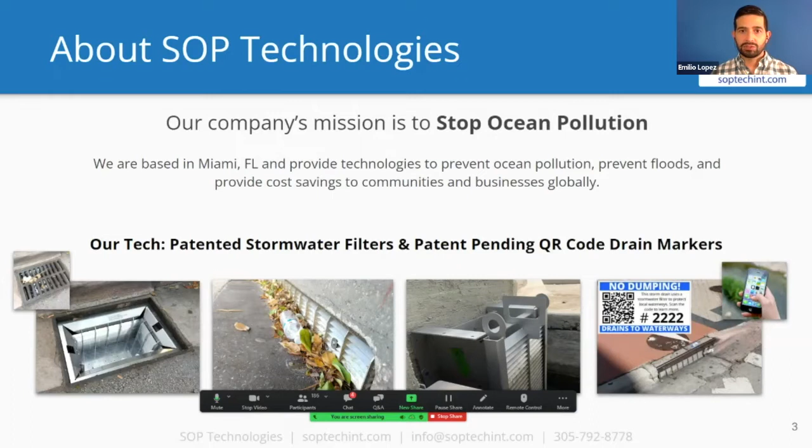On the digital side of things, we have our storm drain markers with QR codes. This is very new. It goes on the storm drain like other storm drain markers, and it allows anybody with a cell phone to point their camera to it, scan the QR code, go to a website, and upload a photo of what they're seeing. They're able to learn about stormwater issues specific to that community.

So let me show you a quick story from Local 10 News. This is back in September, and it will help give a good summary of what we do, why we do it, and who we work with.

Swept away into our waterways and our bays during storms, it's a big problem. While one city prepares for this proven effective tool, another city just got them installed and has gone high-tech to stop pollution. It's tonight's Don't Trash Our Treasure.

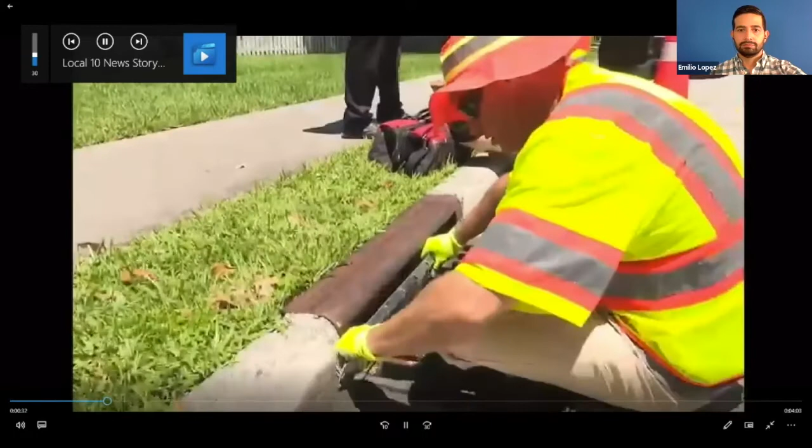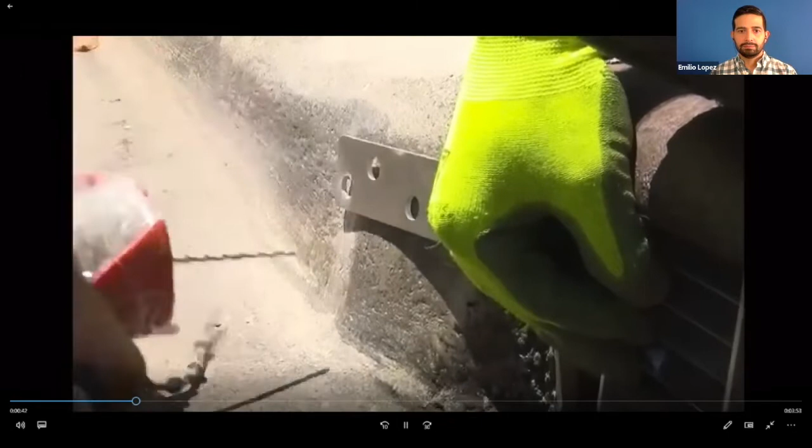It's a big day in the city of Hallandale Beach. It's been taking a while to get this project actually rolling, but to see it going right now, I am extremely excited. After months of planning, the first of these high-tech screens are finally being installed at the open curb inlets along the 800 block of Parkview Drive. We have so much debris going into the intercoastal, into our waterways, so we're trying to protect that.

That's exactly why these screens were designed, to trap all the street litter before it enters the stormwater system, where it eventually flushes out into waterways and the intercoastal. It is a big win for the environment. Thank you, bro. Thank you.

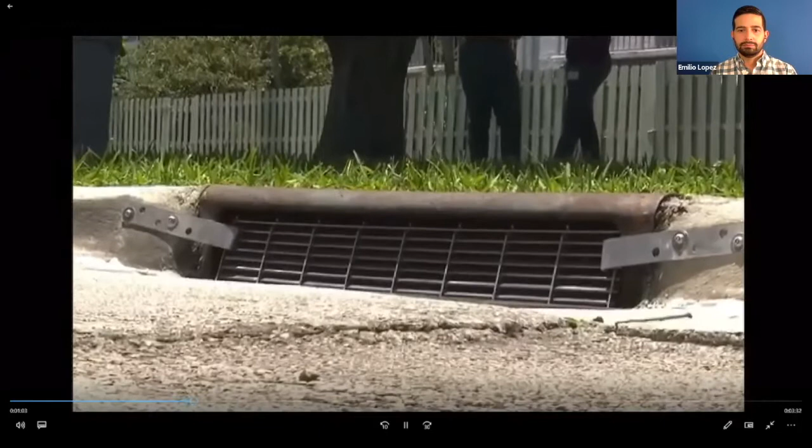Emilio Lopez is the CEO and co-founder of SOP Technologies, who developed the filters to not only reduce pollution in the stormwater system, but to also allow stormwater to flow freely and prevent street flooding. What we patented is the upward flow of water through the screen. The water comes down and up. This design has a much greater open area for water flow.

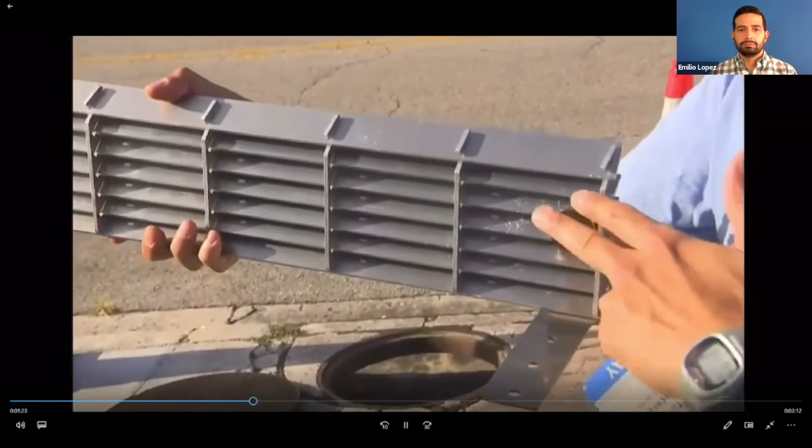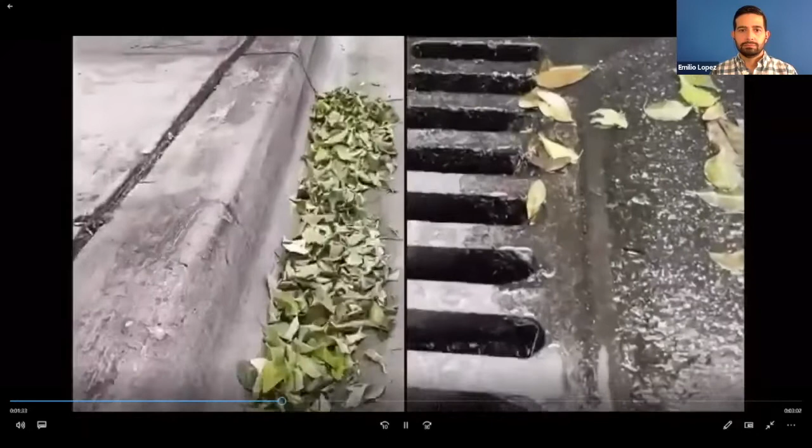They're also designed to stop deadly organics from getting through. These leaves and lawn clippings may look harmless, but they're actually ticking time bombs. As you can see here, water is taking these leaves into the storm drain system. Eventually this leads to Biscayne Bay, and as you know, when this decomposes, it becomes a nutrient.

Phosphorus and nitrogen, deadly nutrients that feed algae growth in our bay and waterways and kill the seagrass. You need to prevent the organics from getting into the waters because they decompose. So leaves, which is a majority of what we actually capture in front of the storm drains.

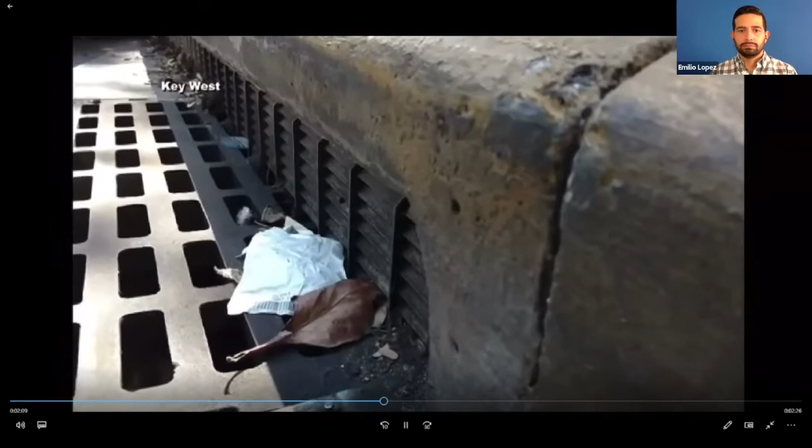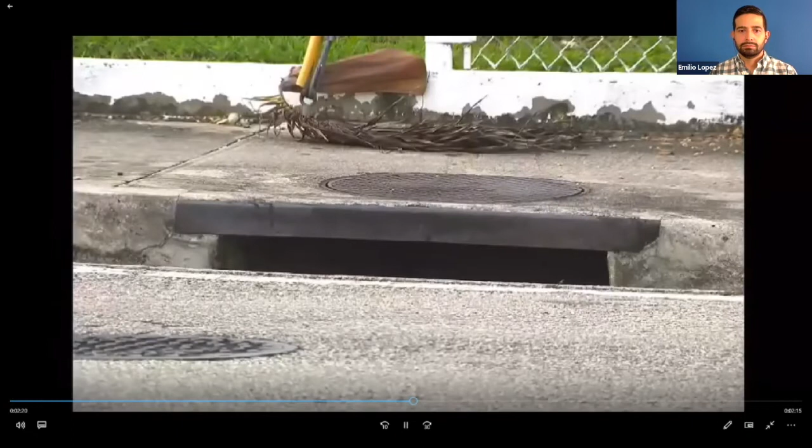The screens already have a proven track record. They were installed along Duval Street in Key West in 2016. 40 were installed in South Miami in 2018. Aventura installed them citywide in 2019. Soon, they'll finally be installed in the city of Miami. 1,000 of them have already been ordered.

It's extremely important. We have 28,000 catch basins in the city, and every single one of them is contributing to the problem by allowing nutrients and debris to get into Biscayne Bay.

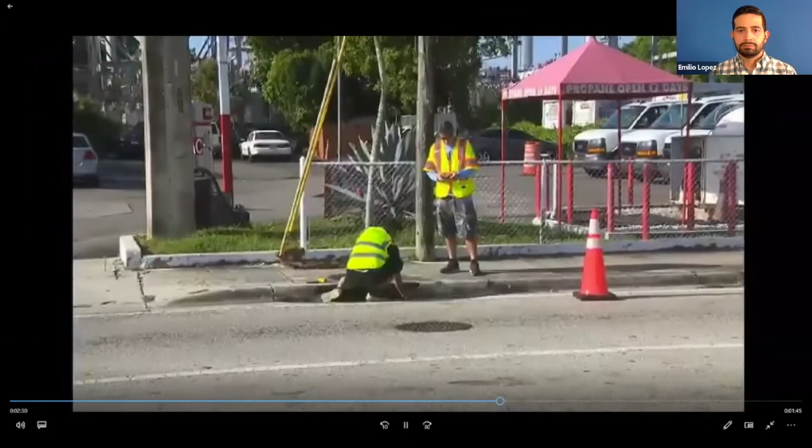On this day, the open inlets along Southwest 16th Street and 27th Avenue were being measured for the custom screens. It'll take 4 to 6 weeks to manufacture them, 250 screens for each of Miami's 4 districts. The first batch to be installed in District 2, downtown Miami, and the Biscayne Bay corridor.

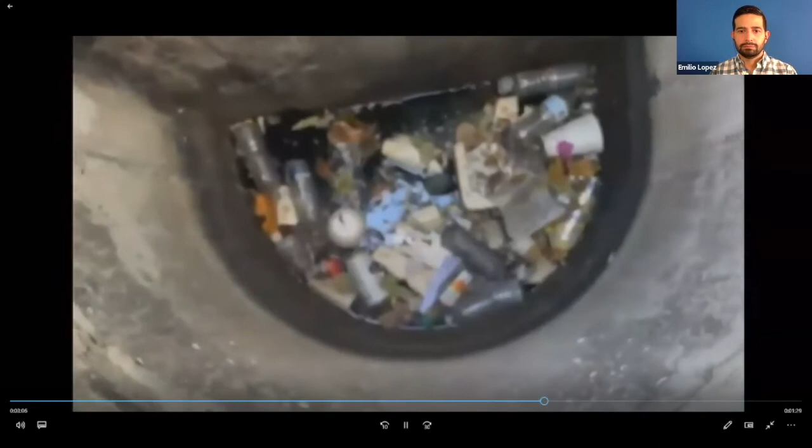We have a lot of areas in the city where we know they're hot spots because of the amount of debris that gets clogged in the system, and we have to keep coming in and cleaning it multiple times a year. And now Public Works can actually track the trashiest storm drains.

Each new screen comes with a QR code that residents can scan with their smartphone and upload pictures to report clogged screens that need to be cleaned.

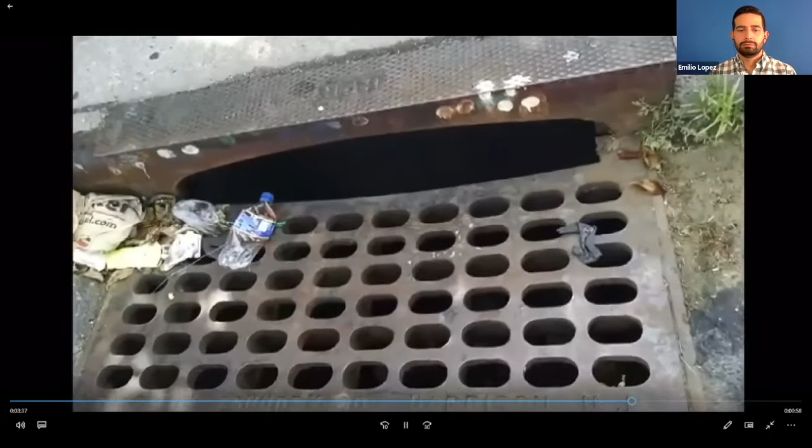Is there an area of the city that we notice consistently has a lot of trash and debris? If that's the case, then maybe we need other methods to address the problem at the root: more garbage cans, no littering signs, tools to attack street trash before it gets in here and out here. It's over 100 pounds per storm drain per year that we're preventing from getting into the storm drain system, giving the Bay a fighting chance to heal.

I'm born and raised in South Florida. We don't want to see pollution in our oceans and waterways, and this is great that we're finally starting to take measures to help reduce the pollution and reduce the flooding that's been occurring here for many years.

All right, the reason I showed that video is because Louis Aguirre, the reporter, is much better at sharing this story than I am. So I hope that was a good overview. So why should we address stormwater pollution?

There's a really good quote from Carl Sagan, the astronomer. I'll read it out quickly: There's perhaps no better demonstration of the folly of human conceits than this distant image of our tiny world. To me, it underscores our responsibility to deal more kindly with one another and to preserve and cherish the pale blue dot, the only home we've ever known.

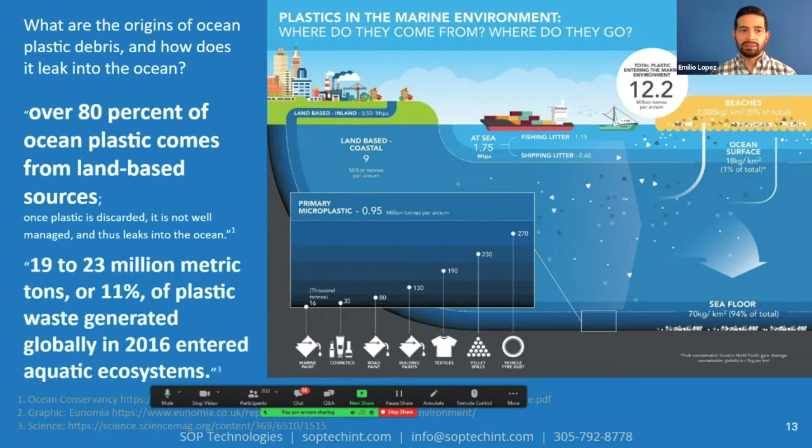At a global scale, it was estimated that between 19 and 23 million metric tons of plastics get into the ocean every year. Another problem this causes is that marine life, including birds, confuse this for food.

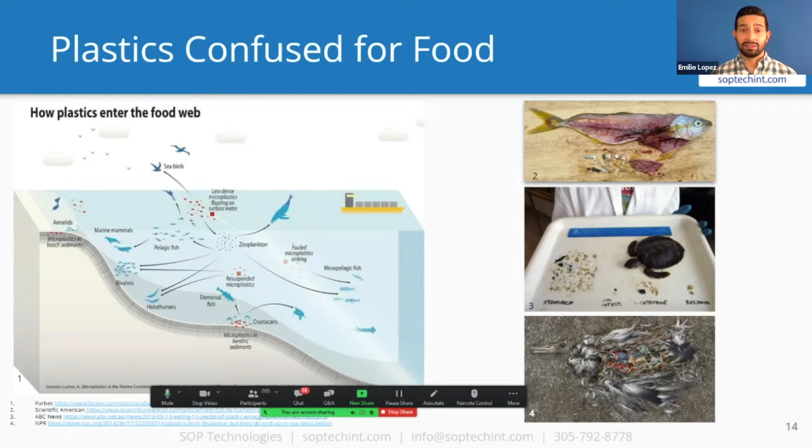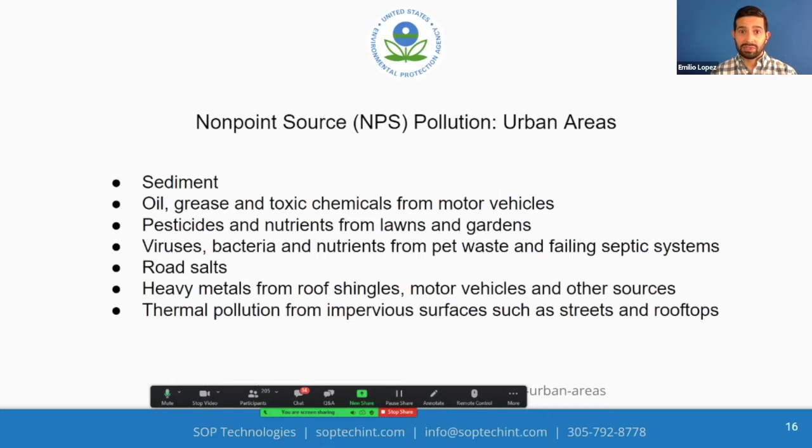In addition to being an aesthetic problem, an economic problem, even an environmental problem from the health side of things, it's also a human health issue. We have sources showing that beaches close due to pollution. Also, people who swim in front of storm drains are likely receiving a lot more contaminants than people that swim further away. There's a very clear link here.

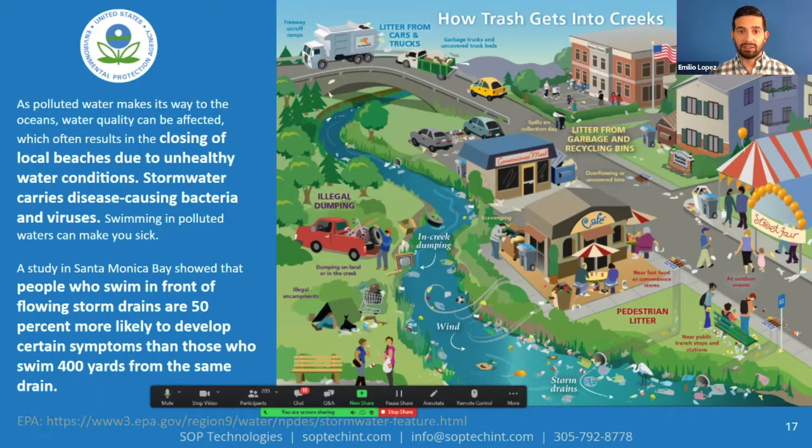So if you care about people's health, if you care about your local economy, if you care about protecting marine life, there are many reasons for addressing stormwater pollution.

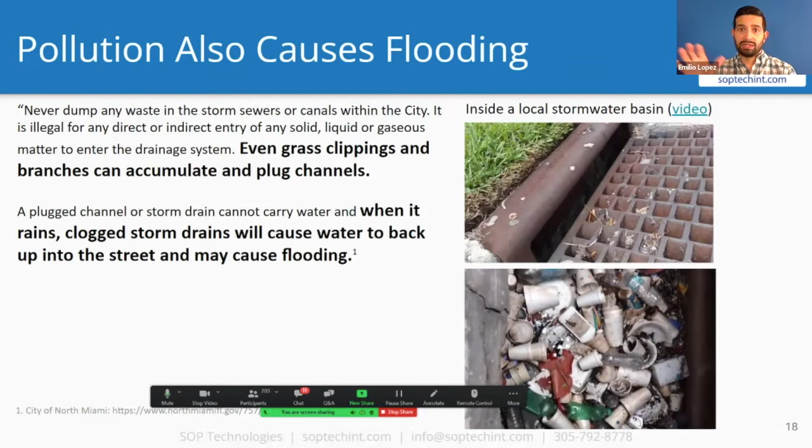Another reason is that it causes flooding, specifically with the bigger items. This is from the City of North Miami's website, talking about leaves and grass clippings. What ends up happening is that this accumulates and clogs up the pipes. Here's a photo of a storm drain - this is not North Miami, but it is in Dade County, showing a lot of litter inside one of these storm drains inside the catch basin. So after it went into the inlet, this accumulated in the basin structure.

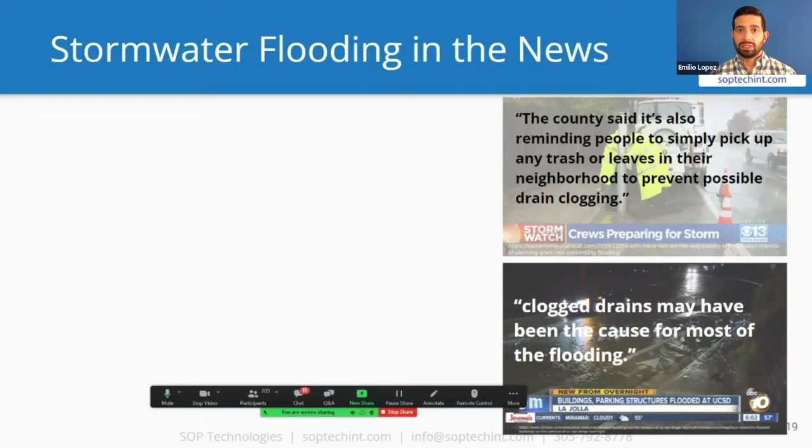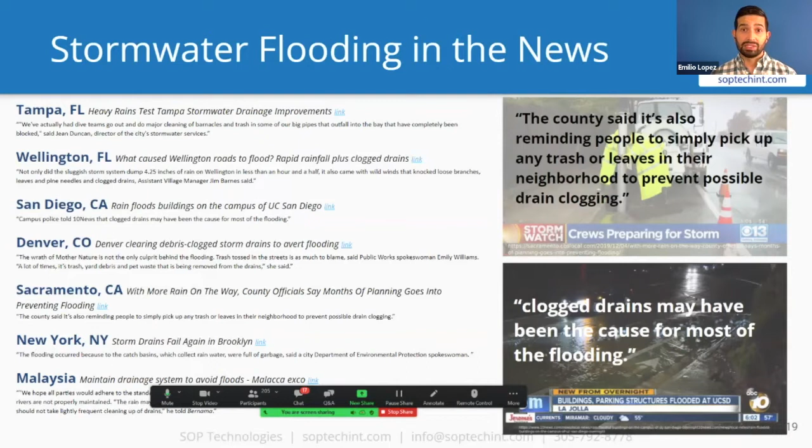A little bit more about stormwater and the link between debris and clogged drains. Here's a couple of news stories. On the bottom right, you see clogged drains may have been the cause for most of the flooding in a specific scenario. And this is very generalized - you have stories from Tampa in Florida, California, Colorado, even Malaysia, we found a news story. So this is very, very well documented. If you need another reason to show your community members why it's important to address this problem or implement solutions, flooding is one of them.

Narrowing it a bit more now to Florida. So how much trash and debris enters the storm drains? Where we have our filters installed, we actually swept in front to figure out what we are actually blocking from getting into the stormwater systems.

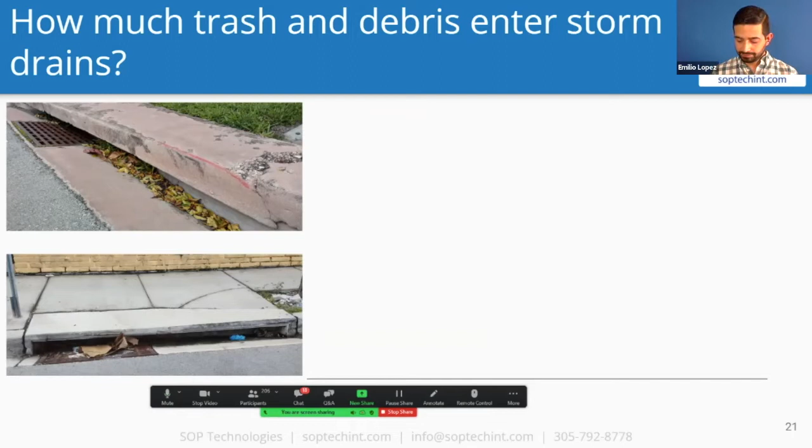We did this at several cities, and by far the grand majority of what we capture in terms of solids is leaves, and this contributes to nutrient pollution, specifically phosphorus and nitrogen. It's a big problem. Also litter - cigarette butts, plastic straws, cans, plastic bottles. More recently, because of COVID, we've also seen a lot of masks.

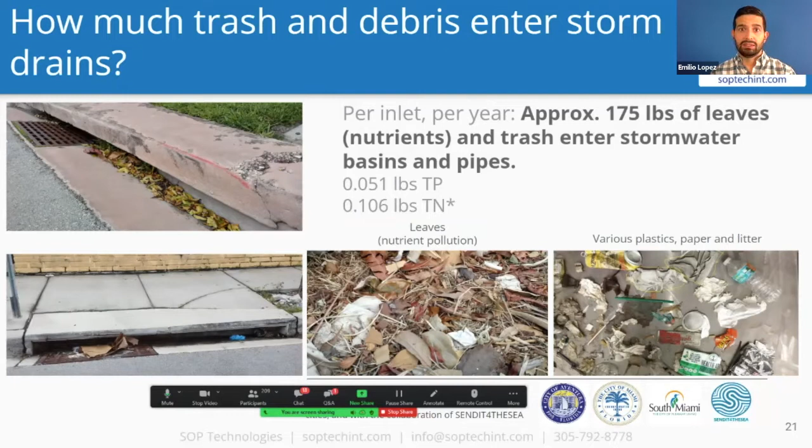So per inlet per year, it's about 175 pounds of leaves, which is a lot of nutrients, and also trash. If you plug this into the DEP calculator, which I'll talk about in a minute, you can figure out what that represents in terms of total phosphorus and total nitrogen - very important for keeping proper nutrient balances for watersheds.

From the USGS, while the sources of nutrients to urban stormwater are many, a primary contributor is often decaying organic matter like leaves. The word decaying is important because if you allow leaves to fall inside a catch basin and sit in water, they'll decompose. Then it becomes a lot harder to collect. Or if it flows out into a canal, by the time it gets there a lot of it is already starting to decompose.

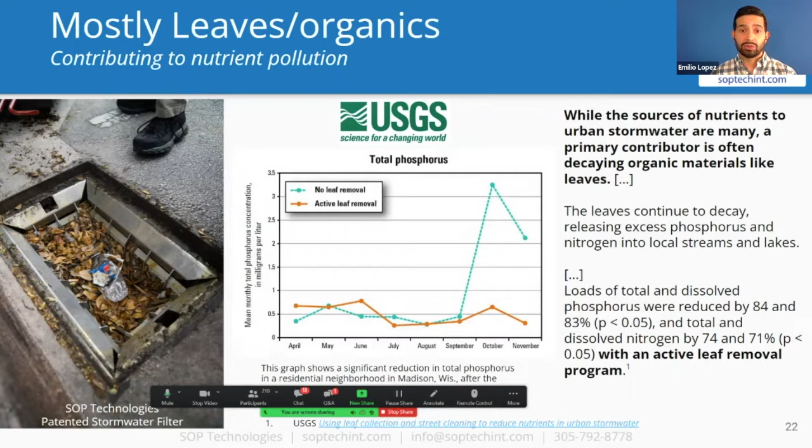This is why it's important to have a leaf removal program and collect these solids as quickly as you can while they're still solid. The USGS, in one of their analyses, found that with an active leaf litter removal program, they were able to dramatically reduce the phosphorus in a waterway.

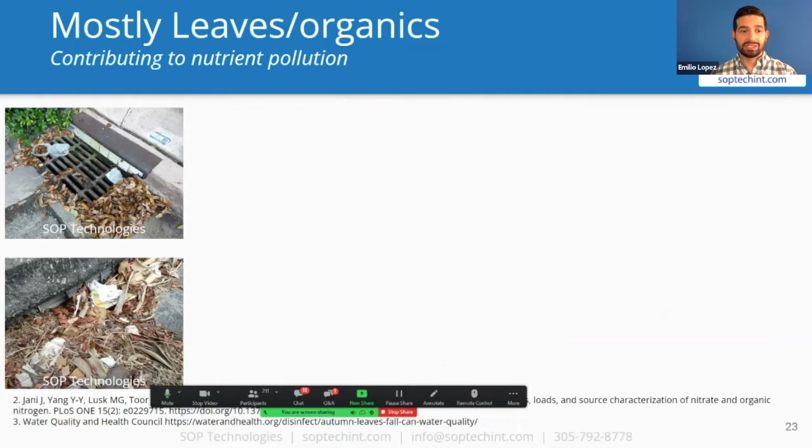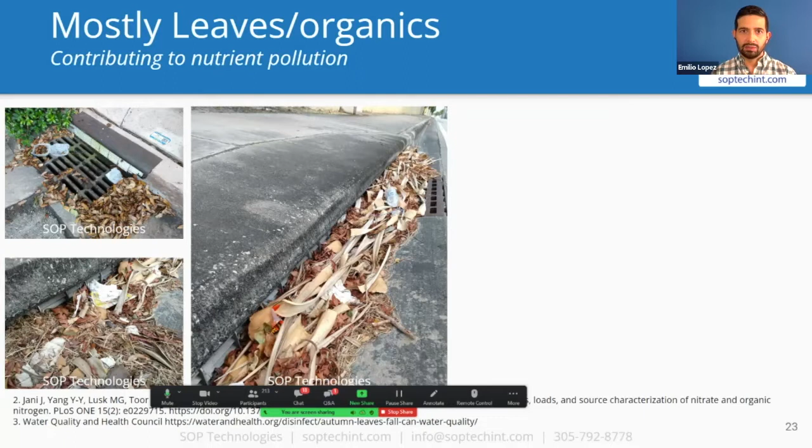Here's some more photos. These are curb filters, and you can see in front of them some plastics, but a lot of leaves. Again, nutrients is a big problem. This is representative of what we see every time we go out there - a lot of organics, some plastics, some litter.

Here's some more sources. Leaf litter has been reported to be one of the main contributors to dissolved organic nitrogen in one of the studies. Leaf litter spikes stormwater systems and watersheds with nutrients during and after rainfall, especially when it gathers along street curbs. Excess phosphorus and nitrogen often lead to major water quality problems for municipalities. All of this is very important information, hopefully, for you.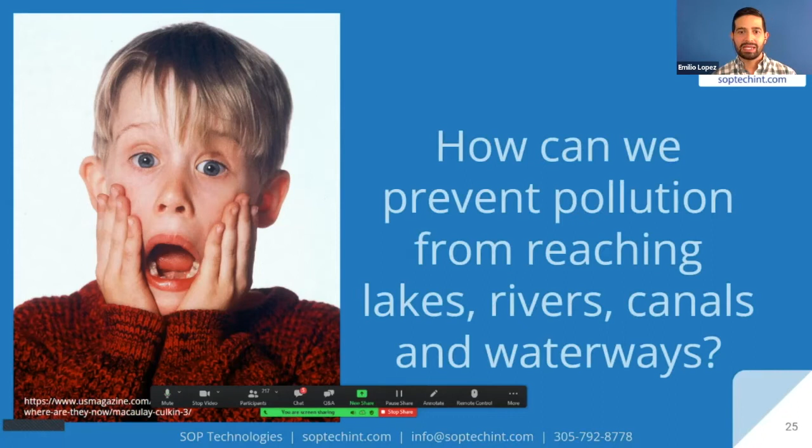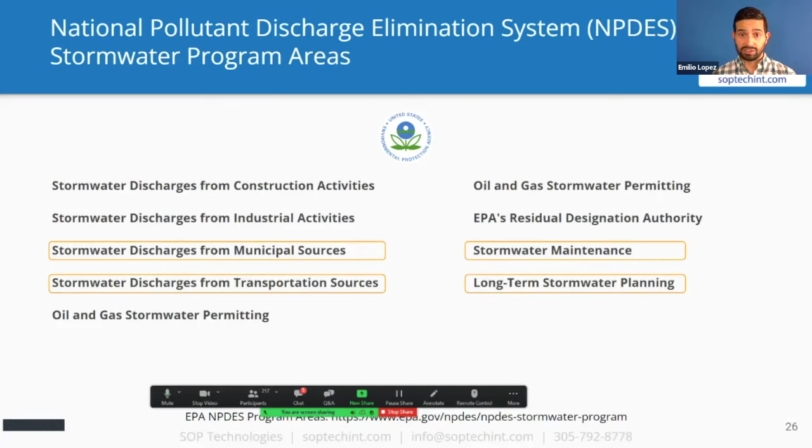So you probably know this image here, this is Kevin McCallister from Home Alone. And the question is, how can we prevent pollution from reaching the lakes, rivers, canals, and waterways? This is a listing here of the stormwater program areas from NPDES. There are many of them, too many to cover in one hour. We're really going to focus on a few of these: stormwater discharges from municipal sources, from transportation sources, maintenance, and long-term stormwater planning.

So there are many options for maintenance or removal. Generally speaking, the closer you are to the source, the real source for litter, of course, is human behavior. Let's not forget that, we need to address those things too. But the source, after things are already on the road and leaves are on the road, the closer you are as a street, the street sweeping is lower cost.

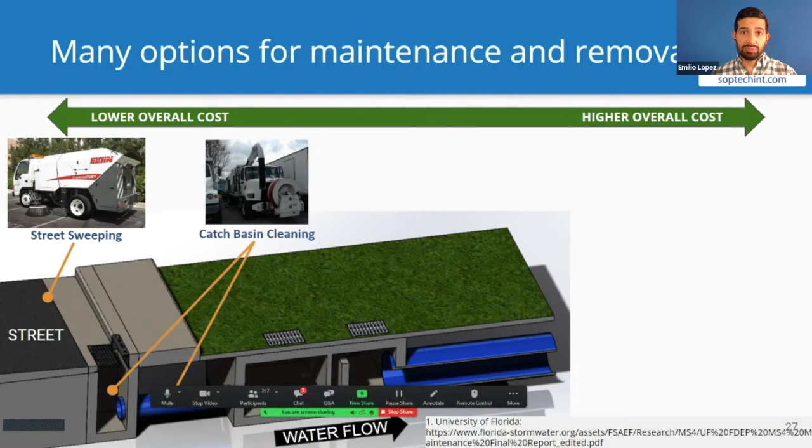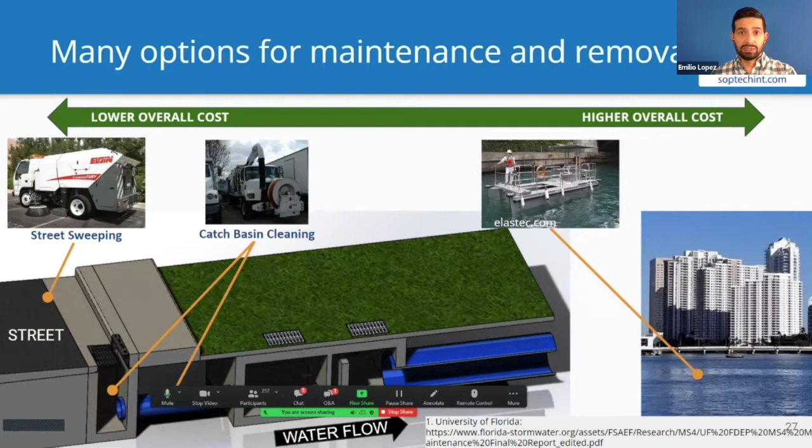Then even if you move a little bit further in, once that goes inside the catch basin, especially when it goes into the pipes, your catch basin cleaning starts getting more expensive. And the further out you go, if you go into the waterway, you might not be able to collect those nutrients very effectively in the waterway with a boat. You can collect your plastics and floatables, but you're talking about higher costs here.

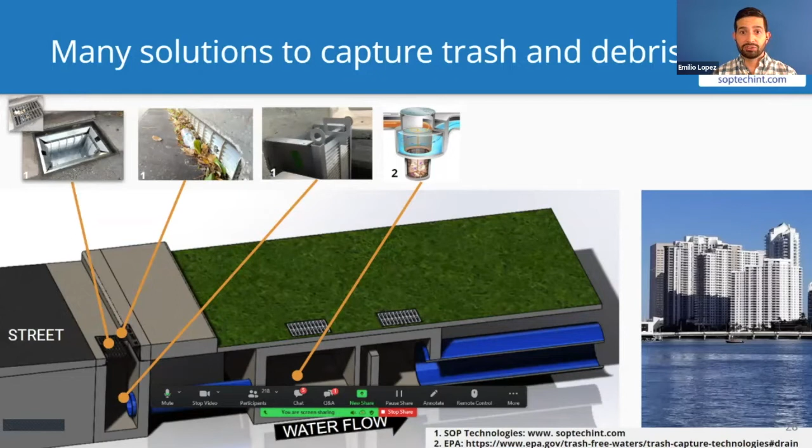There are also many solutions to capture the trash and debris. As you know, our focus is trying to keep it on the street, keep the cost low to collect this. In terms of maintenance, the street sweeping is already enough in front of the screens that keeps them clean. We can also provide something inside the catch basin. There are also other companies out there that provide, for example, these hydrodynamic separators, which are a little more centralized, much bigger systems for different purposes.

You have systems that are further out into the pipes. You have nets in the outfalls, and you also have these booms. Sometimes in canals, I know in Dade County we have several of these. You have booms at the canals that don't allow the floatables and plastics to continue flowing into Biscayne Bay.

Now, something you'll notice if you ever see one of these locations full of plastics and trash, is that you don't see a lot of the organics. I would say that's because it's already dissolved, it quickly dissolves, it doesn't stay up there. And things that sink are harder to capture. So you want to think about those different strategies and technologies.

So what should you consider when you're selecting the technologies to address the debris? I'll start with a story. Once upon a time, actually it was 2017, at the Biscayne Bay Marine Health Summit. This is a summit I'm part of this organization for, and we've held this summit several times, 2017 with about 250 people at FIU.

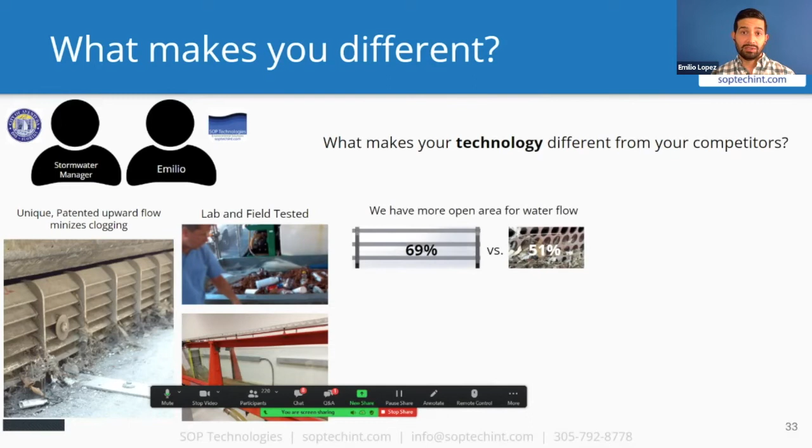Miami-Dade College, we actually worked with them many years ago to do the initial concept of this. FIU, we've done more water flow analysis. I'll say that we have a larger open area for water flow when compared to a standard sheet metal that's perforated. So perforated sheet metal might give you 50-51% maximum open area, and we have about 69% open area. And while we have that larger open area, we actually still stop items that are smaller because of the way our product is designed.

Now notice that I'm giving a lot of details here. I'm even talking about competitors. So when you ask the question, what makes you different from a competitor, make note of the different companies that somebody might tell you, because this can help with your own research. There may be a company that you were considering and now you have new information about them, or someone that you didn't even know existed, and then you can research them as well.

And another thing I would say is, well, our product doesn't have any moving parts, because when we notice that there are moving parts in the stormwater filters, it seems like a good idea that they open up when a lot of water starts flowing. But what actually ends up happening is that then becomes obstructed with some type of debris, and the trash just keeps on flowing through. Another thing we've noticed from a competitor is that they had very large openings.

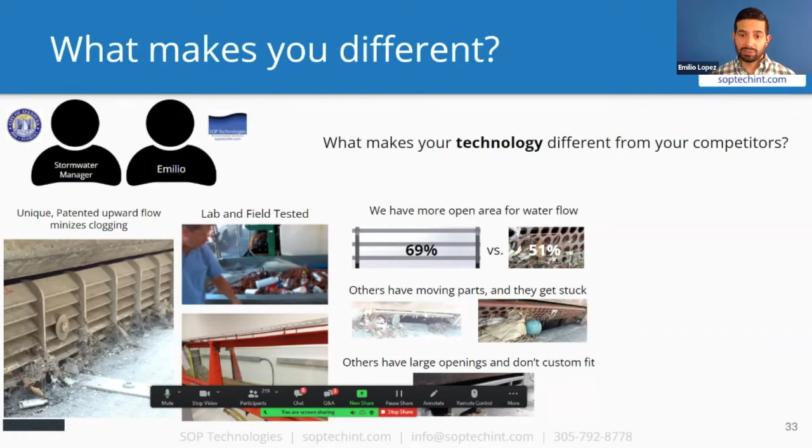So that essentially makes at least their curb filters ineffective. Also, they had one size product, maybe two sizes. And what they were doing is, when we looked at the installations, they actually will fill in with concrete and bricks, the right side and the left side, to fit their product. But what they were actually doing was dramatically reducing the potential area for water flow for that storm drain. What we do is we try to adapt, we go to the closest inch, and that's why we take measurements in the field, so our customers can take the measurements.

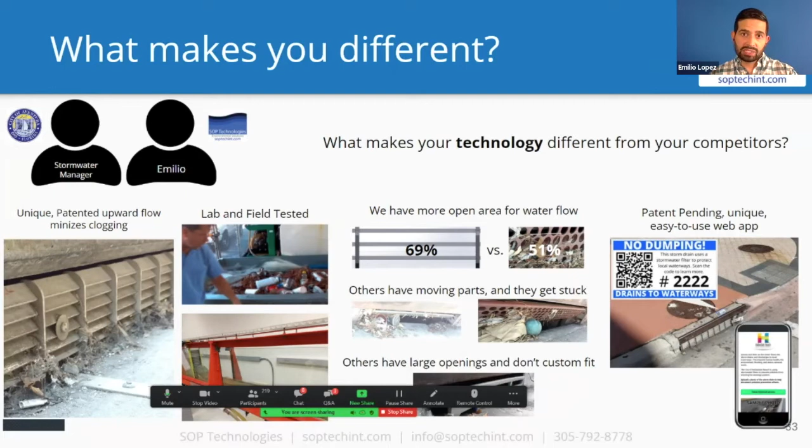On the digital side of things, with the storm drain markers, this is unique. Each one has a unique code, a serial number, and when somebody scans it, they go to a website specific to that client organization. So for example, for storm drain markers in Aventura or Hallandale Beach, depending on where you are, you scan the code and the web app pulls up. It's just a website, and on top you'll see the city's logo.

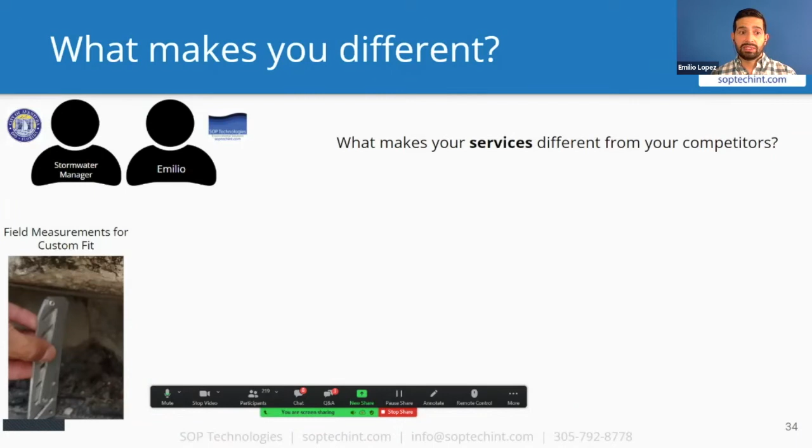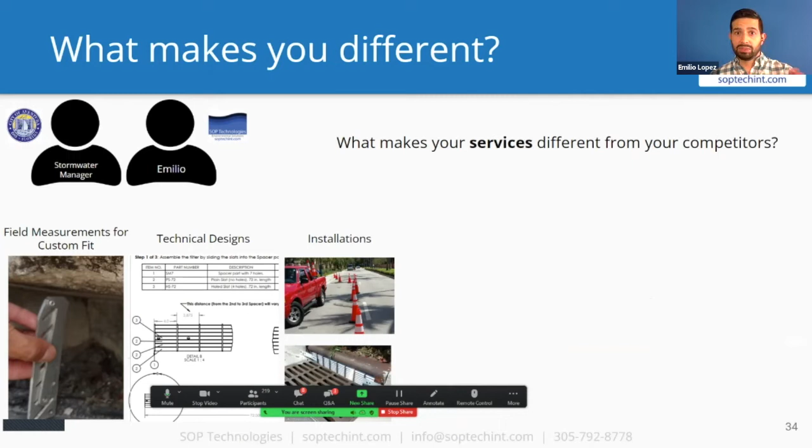There's a more customized message from the city there. Another question you want to know is what makes your technology different, but also your services different. These are two big differentiators between companies and solution providers. So if someone asks me this, I'll say we can do field measurements so we can custom fit the product, we'll do the technical designs, and if you need changes there from the CAD modeling side, we can already start making them. We do the installations of the product.

We also do follow-on analysis and engage with the community. In addition to being part of the Biscayne Bay Marine Health Coalition, I know a lot of other folks aiming to achieve similar things to protect waterways, like Send It for the Sea, Debris-Free Oceans, and different local nonprofits. As much as possible while we're doing things, I try to share on social media along the process. This is actually a good tip for you if you're trying to engage more with your community, whether you're a business or a municipality.

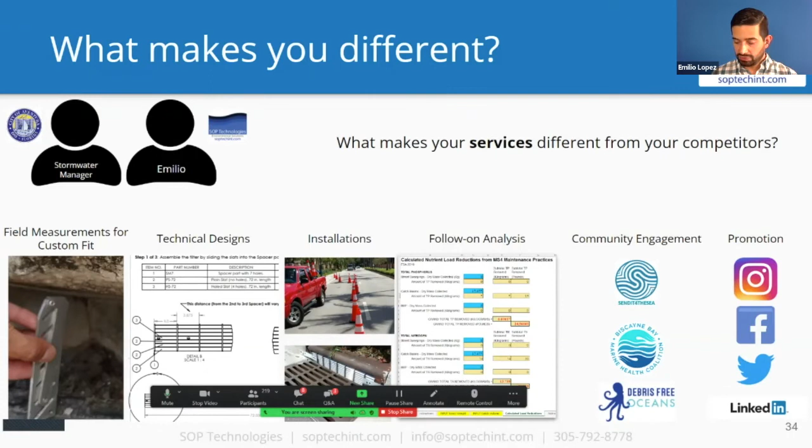Think about what you're already doing. I'm a small business owner, I cannot invest so much in every social media post, so I think about what activities I'm already taking. If I'm taking measurements, I'll make a little video and show, hey, we're taking measurements here so that City X can have our stormwater filters to protect the waterways. These are different ways you can engage with your audience, and we make sure we mention the good work our cities are doing as much as we can.

Another question: what can be customized or changed? On a day-to-day basis, if we're buying a product on Amazon, we don't think about customizations. We think about buying something as is, it comes from the factory, and that's how we use it. But with certain products, you can actually customize and change them a lot. So have this conversation with your potential solution provider. Don't assume that the way they publicize something is the only way you can get it.

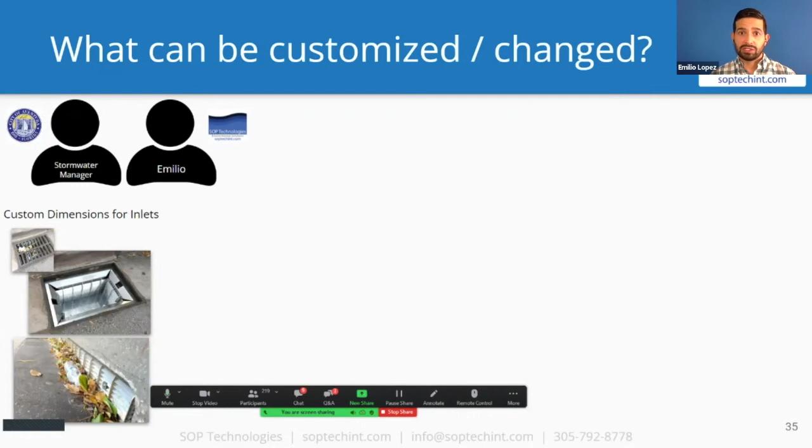In our conversations with our customers, I would say we can customize to the dimensions of the inlets. If you want to have an overflow, we can build that in. There are many different ways we can customize the product.

In Aventura, for example, with Tony, after a while they were actually replacing a lot of their storm drains, and they needed to remove these stormwater filters. We had permanent anchors on there, and Tony said, can we start using some types of screws instead? It's okay, we're not worried about these things becoming damaged, but we want to be able to remove them since we're constantly making upgrades to the system. And I said, okay, so now the future filters that are installed use different types of anchors than before.

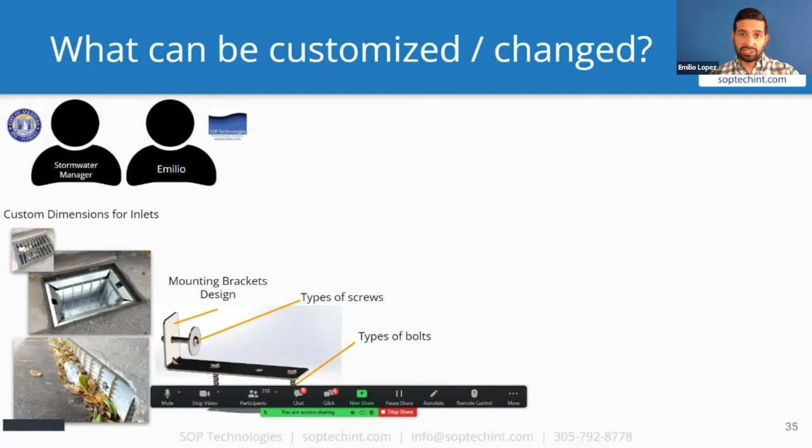So in our case, we can customize and change a lot of this because we're working from the very beginning with sheet metal and CAD modeling. On the digital side with the storm drain markers, if you're purchasing enough of these, then we can also change the text, the little paragraph to the right side of the QR code, and the text on the bottom, to better align with what your city is looking for.

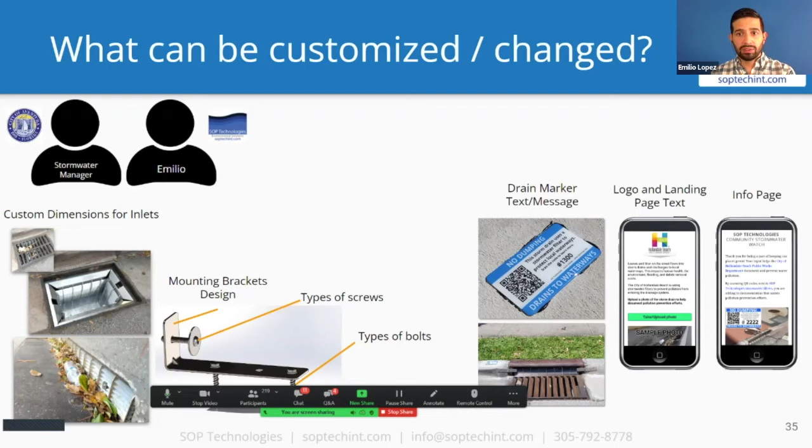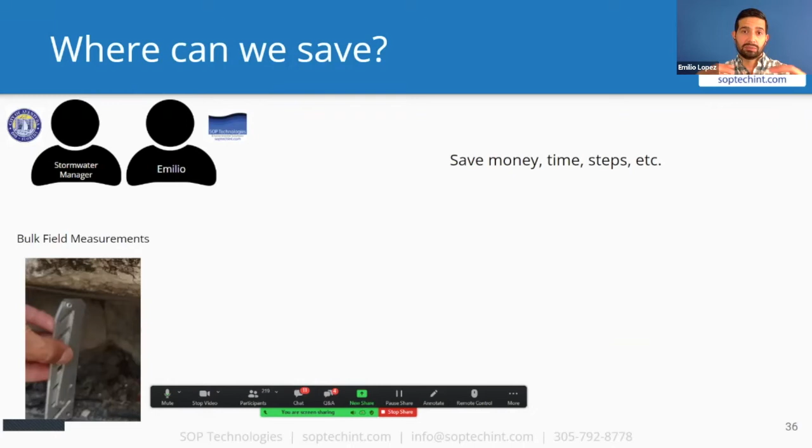And on the website side of things, we can change the text on the landing page, and then also the information page afterwards. After someone submits a photo and fills out an easy form of what they're seeing at the storm drain, they go to another page where they learn more. This is specific to every city, and we can customize that a lot actually. Another question that I don't often get, but is very important, is where can we save money throughout the entire process? This is why it's good to talk about the process and details with your solution provider.

In our case, I would say bulk field measurements. If you know you need hundreds of stormwater filters installed, and we go out there and do entire days of work, that's going to save a lot of money instead of just doing a few and then manufacturing a few and then shipping a few.

Going to the manufacturing side of things, we start off with a sheet of metal, for example a 5x10 sheet of aluminum, and that has to get lasered, then those parts are removed from that sheet and the product is assembled. If you're only implementing a small batch of units, the setup time for the laser machine, the punching machine, the bending or welding machine in the machine shop is divided only into a few units. But if you have a lot more units, that setup time happens once and you produce a lot. This is why we're able to save a lot of cost.

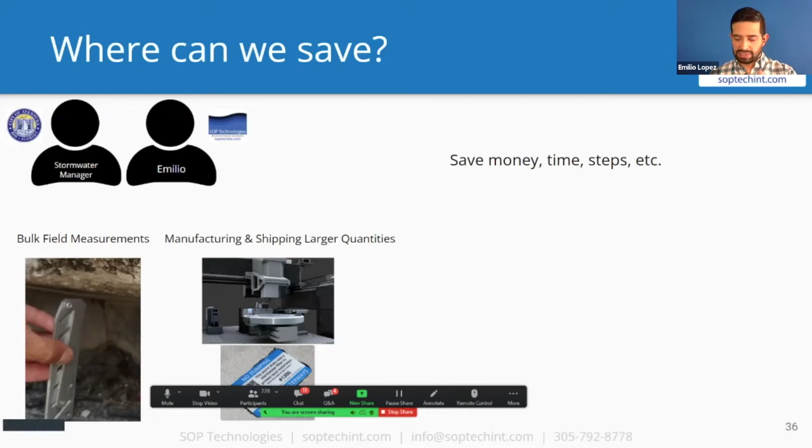For the city of Aventura, for example, when they decided to go citywide a couple of years ago, they saved 7%, because we were able to reduce our cost dramatically on materials and manufacturing, and we transferred that cost savings to the customer. The same goes with the storm drain markers, volume, you have different tiers of pricing. So ask these questions to your vendors: where can we save money somewhere, somehow in our process?

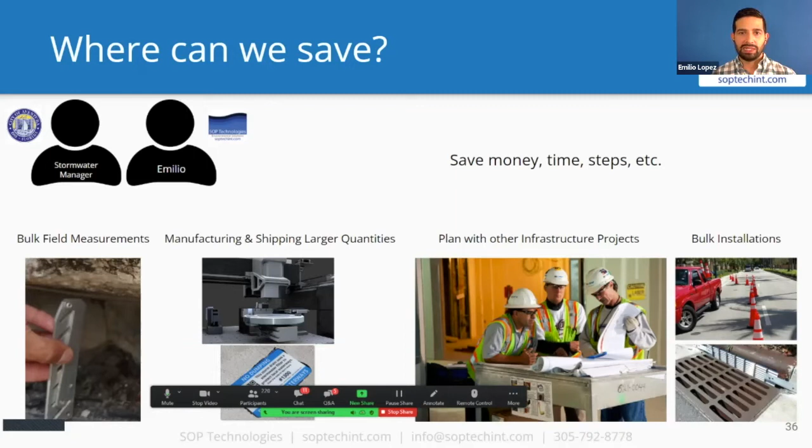Another one is planning ahead. In the case of us and installations, for example, we do maintenance of traffic when we're installing. So if there's an existing roadway project and you know you might want some type of solution there, if we don't have to worry about maintenance of traffic, which actually takes up a lot of our time when we're doing installations, that allows us to just focus on installing. So your cost can go down for installation because of that. A little bit of planning goes a long way in helping your organization save money.

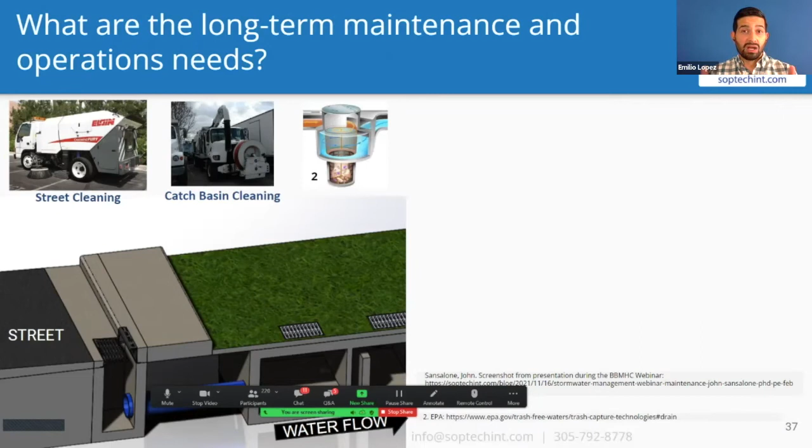What are the long-term maintenance and operational needs and costs for that particular product? Sometimes we tend to think of the product right now, what are the dollars I'm spending today. But think about the life cycle of the entire product. Is this going to last 10, 20, 50 years? How much is it going to cost me in the long run? Maybe that will change your decision-making once you find out the financials in the long run.

This table on the right side is a very good one from Professor Sansalone from the University of Florida. He looked at many MS4s in Florida and gave this report to Florida DEP. Essentially, it shows for different maintenance practices, how much it costs to capture total nitrogen, total phosphorus, and particulate matter. By far, the lowest cost is street sweeping. You see this theme where it's important to capture the streets, the leaves and organics, to maintain your system clean, and prevent the nutrients from getting in.

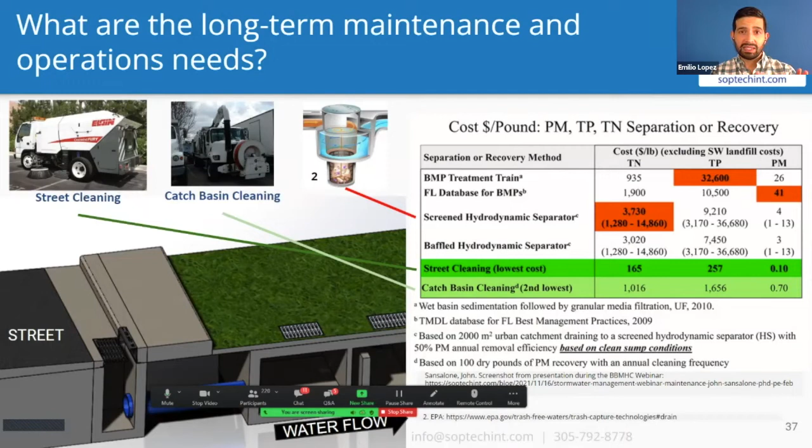Sweeping is $165 per pound for capturing total nitrogen, according to his study. If you go a little further, into the pipes, catch basin cleaning is the next lowest cost, but it's already at $1,016 — about 6 times more expensive per pound of TN collected. In his example with hydrodynamic separators, this goes up a lot more — you're talking about $3,700 per pound of TN collected, according to his study. So think about this when you're making your decisions as far as what to implement.

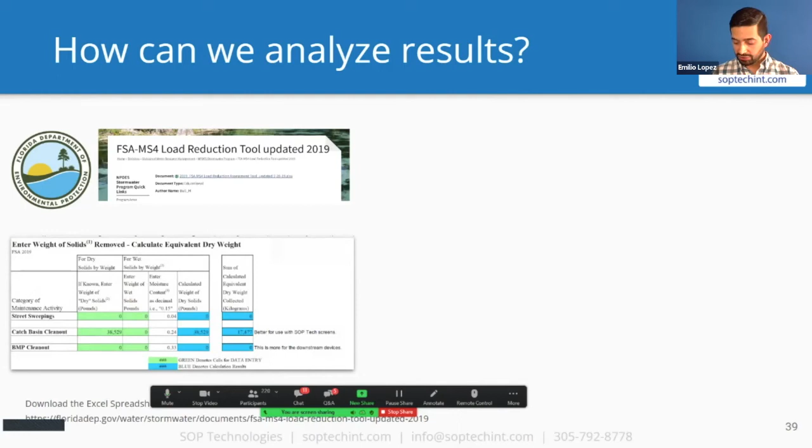You plug into one of the sheets the pounds of trash and debris that you're collecting. For example, in the city of Aventura, in front of our stormwater filters, it's estimated about 38,000 pounds of leaves and trash are prevented from getting into the storm drains every year. We plug in the 38,000 pounds number, and that translates to total phosphorus and total nitrogen on another sheet of the spreadsheet. So you see that the city is preventing 14.5 pounds of TP and 30.2 pounds of TN per year from getting into the waterways.

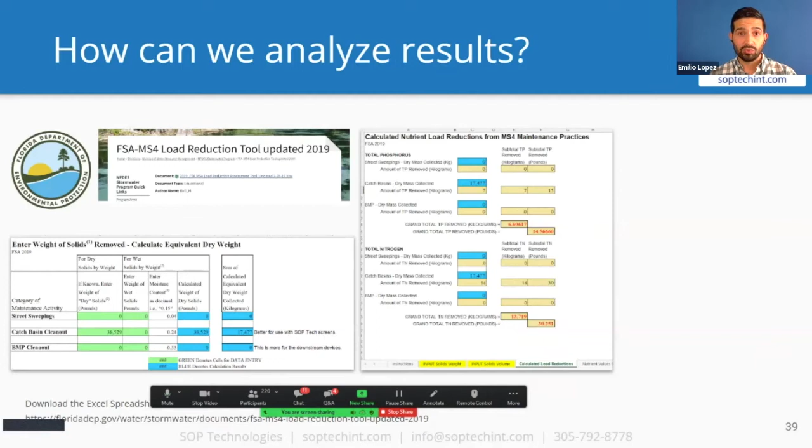This is a really big benefit to the city. Then you also have community participation. When you have the QR code storm drain markers, anyone can scan and take a picture. We spoke already about this, you saw it in the news story. This will help us focus more efforts on the block-by-block level.

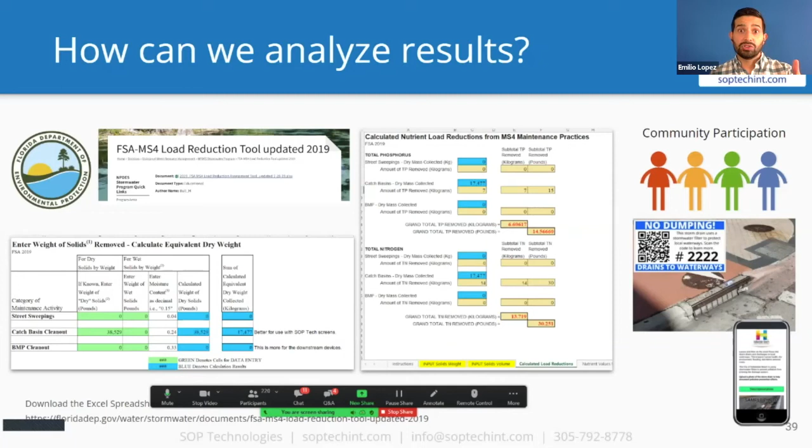My goal, and I tell this to every customer, is that the goal is not to put our stormwater filters in and forever see a lot of trash in front of them. That's not the real win. The win is when you put them there, you start noticing you're capturing a lot of trash, especially on the litter side of things, because that's human behavior. Then you start honing and focusing your strategies at a block-by-block level and addressing it. In the future, you're seeing less trash in front of the filters. The goal is to prevent pollution.

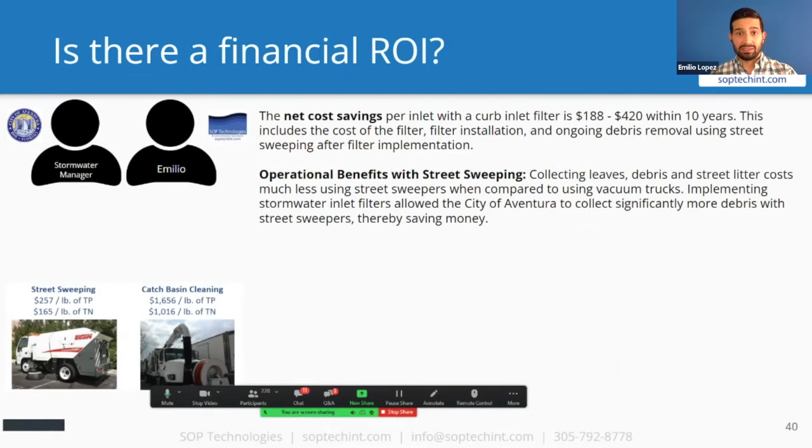Another question is, is there a financial return on investment? In our case, there's a net cost savings through time. Of course, there's an upfront investment to implement the solution, but as time goes by, you've shifted. You've gone from doing a lot of vacuum cleaning for your system because that was the only option, with everything going inside your pipes and drains.

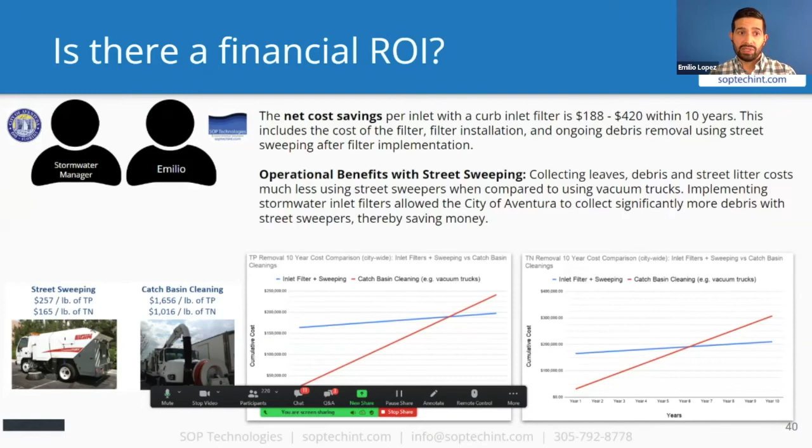Now you're sweeping the streets, and you have a much lower cost. So in about 5 to 7 years, you have your break-even point, and after that you're actually saving money. This shows that for every stormwater filter you're installing, you're helping to save money in the long run. A lot of vendors and solutions providers can help you with this information as well.

Another important question is, do you have references and testimonials? Here's another opportunity for you to know who this potential vendor or solution provider, whether digital or physical, works with. If you see somebody hemming and hawing, not wanting to give you this information, it's because either they don't have positive testimonials or people won't say good things if you contact them. So this is a very important question to ask.

In our case, we even put some of these things on our website so that anybody can see them publicly. A lot of these are in public documents from commission meetings. We're very open about this, and we'll gladly share contacts with you so you can ask questions.

Another important thing: how can you engage with your community? I'm going a little faster now since we're already 45 minutes in or so. I asked a question to several organizations, municipalities, and nonprofits from many places, and there were some recurring themes in the responses they gave me.

Number one is you want long-term, multi-stakeholder engagement. If you're a business like me, think about what nonprofits care about what I care about, and what other businesses might care about the same things. If you're a city, think about what local leaders are thinking and saying, who the influencers are. Especially with nonprofits, many have thousands of followers on Instagram, and they can be fantastic allies in your efforts to address problems.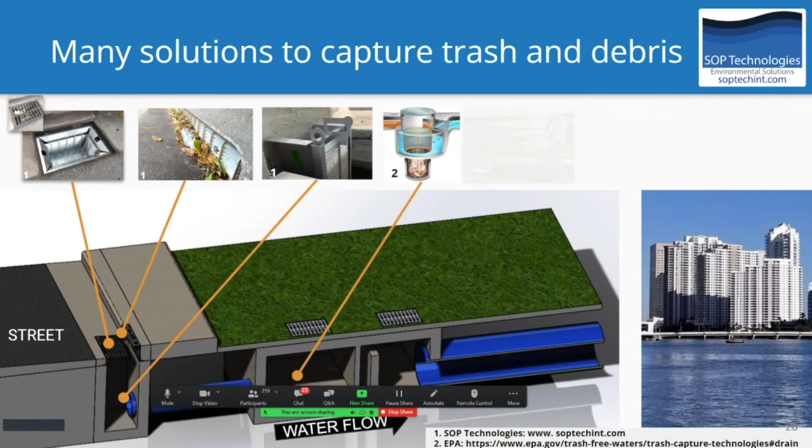Okay, so a little bit more about selecting these different solutions. I would say a lot of this starts off with your goals. As you saw in the Q&A, there were questions about what specifically your screens capture or don't capture, questions about microplastics, oils and fuels. We don't do everything. We don't actually intend with these products to stop everything at the inlet.

So think about the goals you have in mind, and then you can find different solutions providers depending on these goals. Let's say you want to capture the big stuff, the leaves and the plastics and the organics before they get into the drain, and you also want to capture the oils and other contaminants. Maybe you can have a multi-pronged approach to these solutions. Your goals are really what's going to help you determine the type of solution you're implementing.

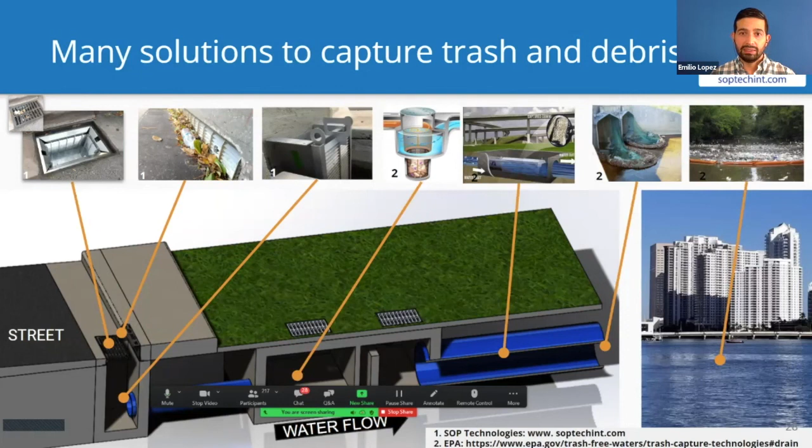So it might be a more iterative process where you have meetings internally. You also contact different municipalities near you and ask them what they think about different solutions. Then once you have meetings with these different solutions providers, ask them what they do, what they don't do, and why and how—that will help you navigate and find a good mix of solutions. Again, our products do not do everything. No product does everything, but I think the combination of solutions is really what we're talking about, including, of course, collaboration with the community and these different organizations out there.

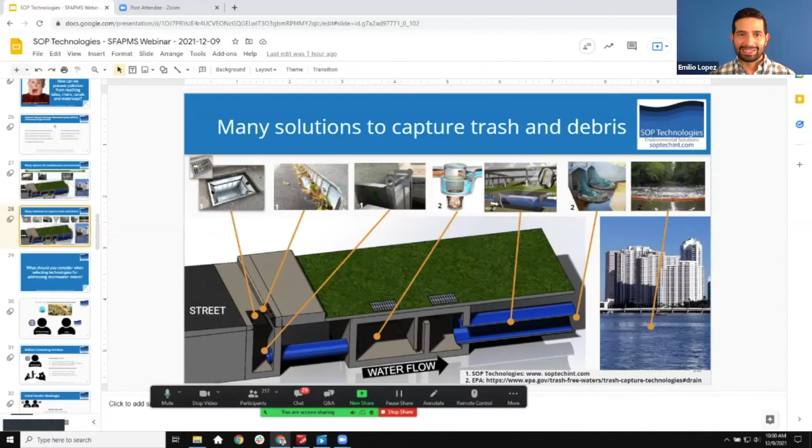I know that was quick, but we're running out of time, so I hope that was at least a little bit helpful for you. I'll go now to the final thought, so we can be aware of everybody's time. One final thought for you: I know there was a lot of information shared here, but it all starts with one step.

Here is a Chinese philosopher saying from many years ago, around 500 BC: the journey of a thousand miles begins with one step. And that's how it is, right? So if there was something here that spoke to you, that makes you think, I want to take a step to doing that, or maybe I want to accomplish this very large goal, but I need to take my first step—that's all it really starts with, that one step.

And to that end, we have a survey for you, and this is more of an action survey. One of the questions—we'll also send you this via email, Colleen will send it, or I can send it—is a survey that's going to ask you what action do you plan to take as a result of this webinar, and then it's going to ask you when you want me, Emilio, to follow up with you, so I can be your accountability partner on this and help you.

So if you say in that survey, check in with me within 30 to 60 days on this specific action that I mentioned, then I'll check in with you. Once you fill out that survey, your email is requested at the beginning, and it will automatically email you your own response, so you have that as a reminder. Again, all it takes is the first step.